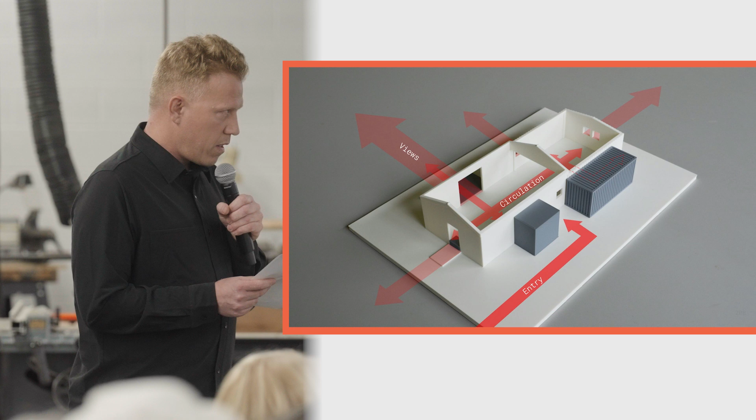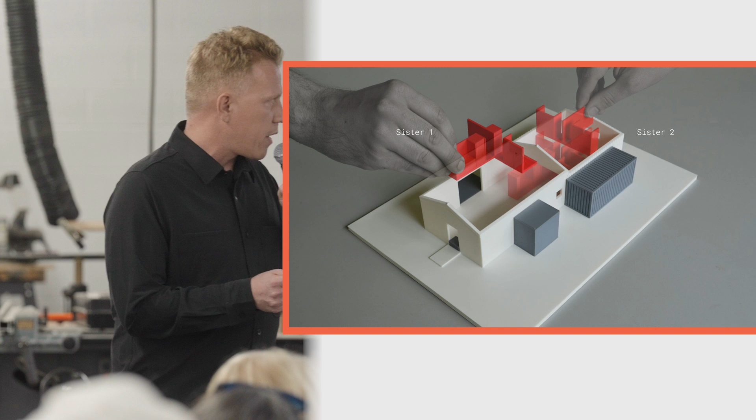On the interior, two objects referred to as Sister 1 and Sister 2 are inserted into the shacks. Each possesses the functions to achieve human comfort. Formally, these objects are, of course, sistered to the original, reinforcing the intent for compact and minimal living.

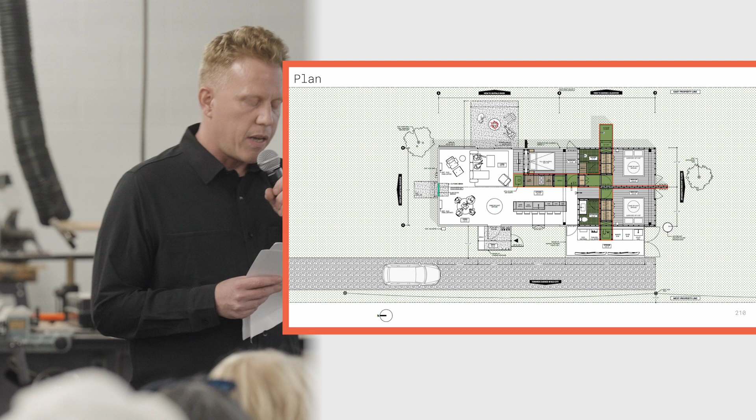In the plan, the act of sistering evolves into an interlock, allowing for flexible sleeping as well as expanded food preparation, while maintaining acoustic privacy between living and sleeping.

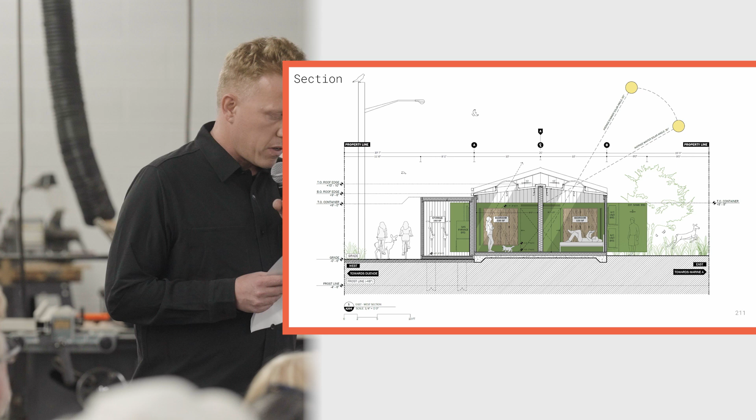Once the envelope thermally is introduced, you can feel the compactness. Thus, we intervene in the vertical axis by introducing globy skylights, which overlap with the structural girts, creating tension between old and new while improving daylight access.

Being true to our reductive ethos, only one new opening per facade. With each aperture piercing through the shack, we create expansive views of the silos, while resolving life safety requirements.

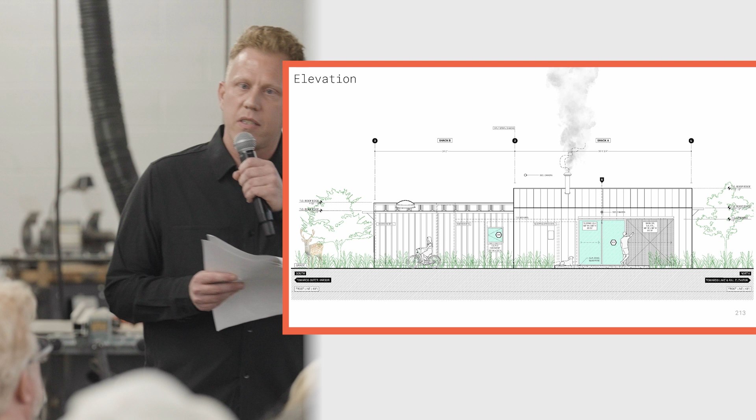The largest barn-style opening faces the river. Made of reclaimed sheet iron, this shutter allows the sisters to spill outside, creating a one-of-a-kind waterfront property, something that does not exist in the city currently.

In collaboration with Josh Smith, a meadow full of wild perennials will surround the sisters—not just clumps of color, but capturing the emotions of seasonality. Rewilding creates both natural security as well as a home for both wildlife and humans.

Our favorite species is Agastache, codenamed Blue Fortune, which attracts butterflies, hummingbirds, and bees, while resisting the antagonist of the deer.

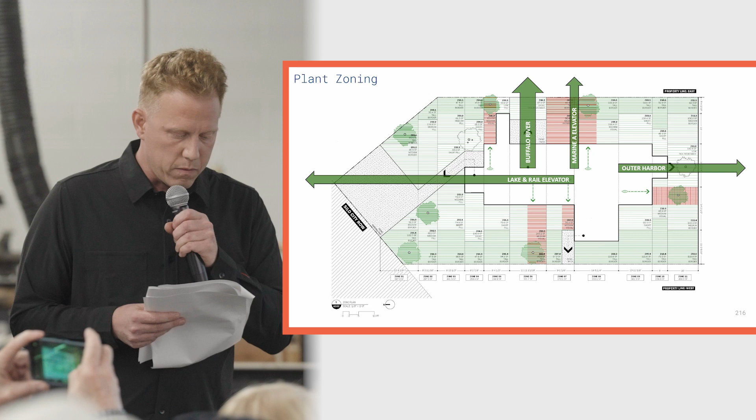Driven by a naturalist approach, we follow ecology rather than purely aesthetics and work towards healing of the soil. In terms of zoning—not for buildings, but for plants—our ambitions are to connect the interior to the exterior, where the foreground is something that is emotional, natural, and wild, and the background is stoic, raw, and industrial.

In closing, Sister Shack is tiny when compared to the colossal giants, tiny enough that perhaps the IAS trifecta wants to build it. Yet its impact should not be measured by size, but how it preserves our industrial heritage, produces prototypes for housing, and contributes to the future reclamation of Buffalo.